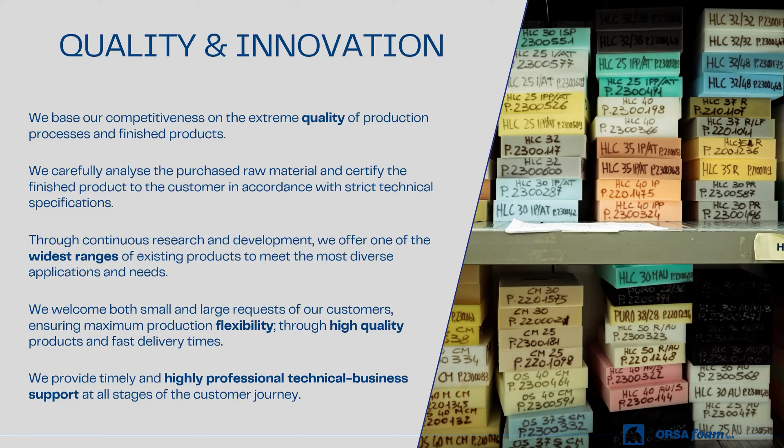And thanks to our laboratory, it's possible to study, research continually, and develop new innovation for this sector. The presentation of today will be focused on our sustainable material products. This is our range. This is one of the widest ranges on the market.

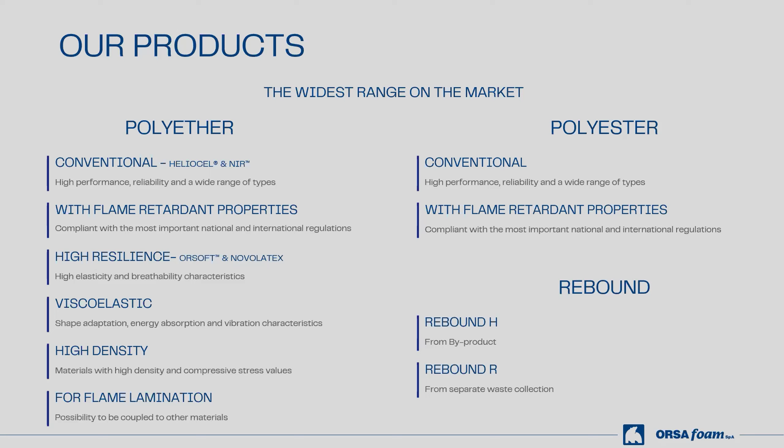We produce polyurethane foam in both polyether base and polyester base. For the polyether, we have the conventional one, the one with flame retardant properties, high resilience, viscoelastic, and so on. For the polyester, we only have conventional and flame retardant. And we also have a line of production of rebound foam. We have two collections here: the Rebound H that is based on byproduct, and the Rebound R that is based on separate waste collection. And we will see them later.

We've always been committed to sustainability. We have been active in this field since the early 80s with the production of Rebound H, which is made from our scraps. And over the years, we were one of the first to introduce bio-based polyol in polyurethane. And recently, we also introduced some products that can be part of the circular economy. So we use scraps, second raw material, for the production of rebound, and we also introduce repolyol in the production of polyurethane foam.

For those who don't know, polyurethane can have many different applications. First of all, the comfort sector, so furniture and bedding. As you can imagine, most sofas and mattresses are made of polyurethane. We are also active in the household industry with the production of sponges that are used to clean the house, the dishes, the car, every kind of surface. Also in the textile sector for clothing or other similar applications, for example, padding for bags.

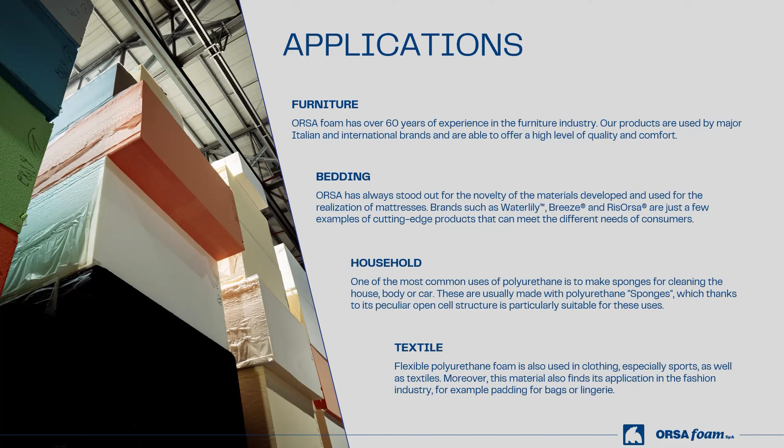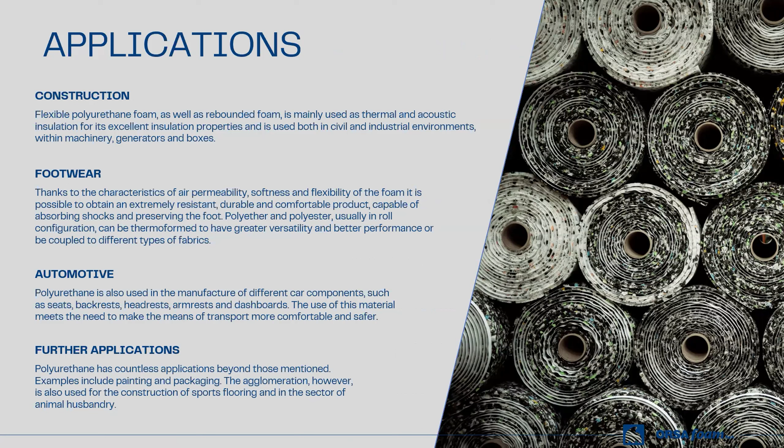And talking more about the rebound foam, but also polyester-based polyurethane, we are active in the construction sector, in footwear, in automotive and many other applications, for example, the painting roll, packaging, sport floors, and even animal husbandry.

So the main topic of this presentation is to present to you our sustainability journey and all the products that we have that have a good impact on the environment in different ways. First of all, as I told you before, the Rebound H is the first step that we took in this sector. It is a rebound flexible foam that is made with our scraps. It basically uses a byproduct: we take our production scraps and also those from our clients, and we take them back, granulate, and agglomerate.

This is like the first step that we take in this field. In the early 2006, we introduced the RisOrsa range that is made using soy-based raw material. This is the first introduction of bio-based polyol in the polyurethane foam, and this is a very performing product that combines breathability, comfort, but also durability and elasticity.

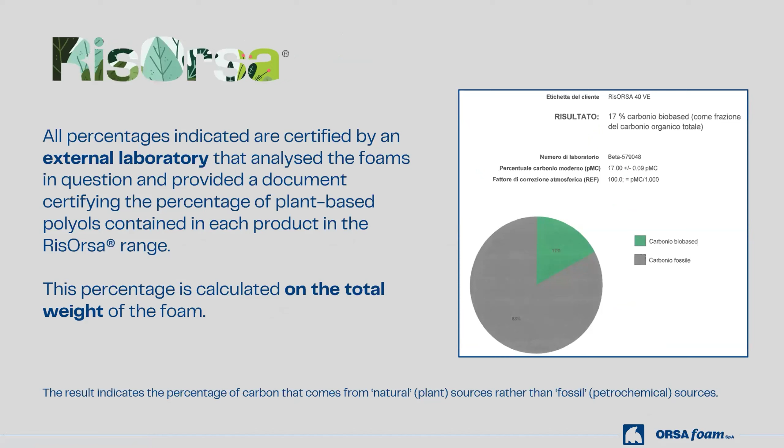In this slide, we show you one of the pages that compose the certificate, in which you can see the total amount of the weight of the foam and the percentage on the total weight of the foam based on renewable resources. You can see it in green.

Okay, in this slide, now we are speaking about another completely different topic: the ways in which we can recycle flexible polyurethane foam. First, we have energy recovery. During burning, the foam develops a high amount of energy, so it's possible to use it for energy recovery. The second way is mechanical recycling, so granulation. With this technique, we can produce rebonded foam, as already told by Davide.

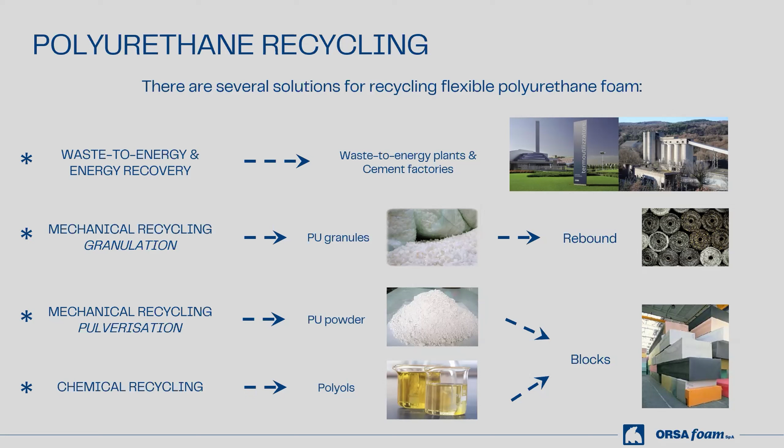Then we have another way of mechanical recycling by reducing the foam to a powder. This powder is added to the formulation in order to produce, again, flexible polyurethane foam. The last one, the newest, is chemical recycling. Through a chemical reaction, we can use end-of-waste flexible polyurethane foam and return to the initial polyol that we can use again in the formulation to produce flexible polyurethane foam.

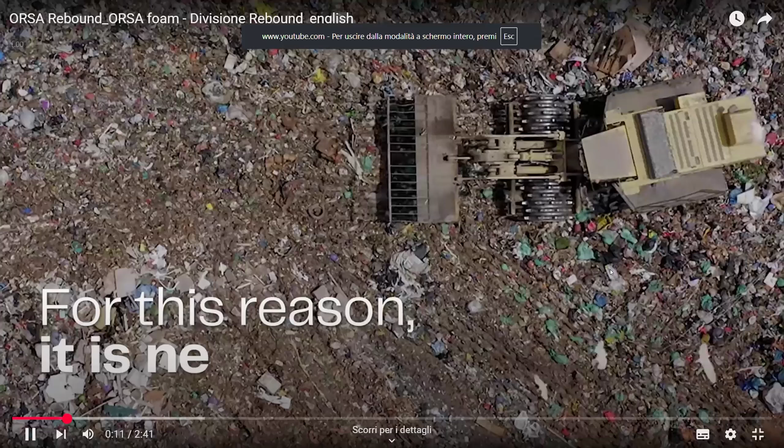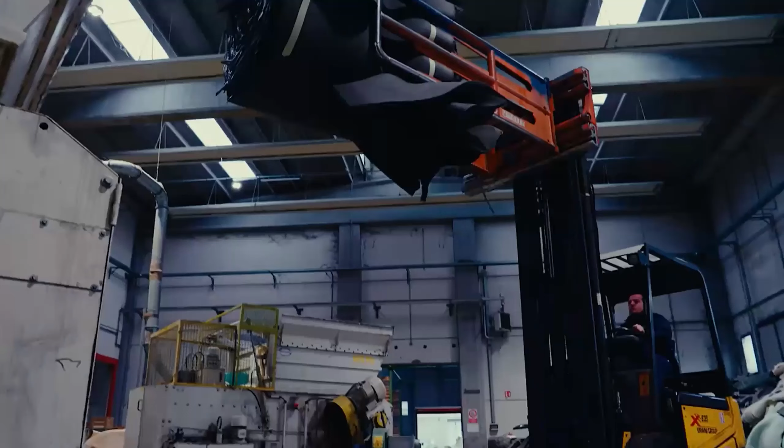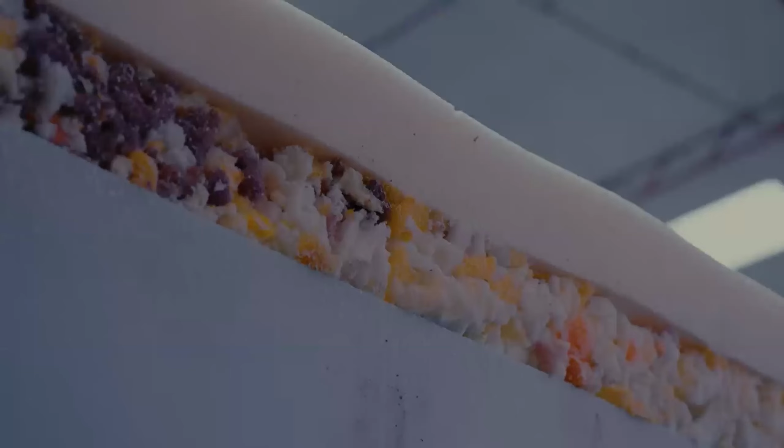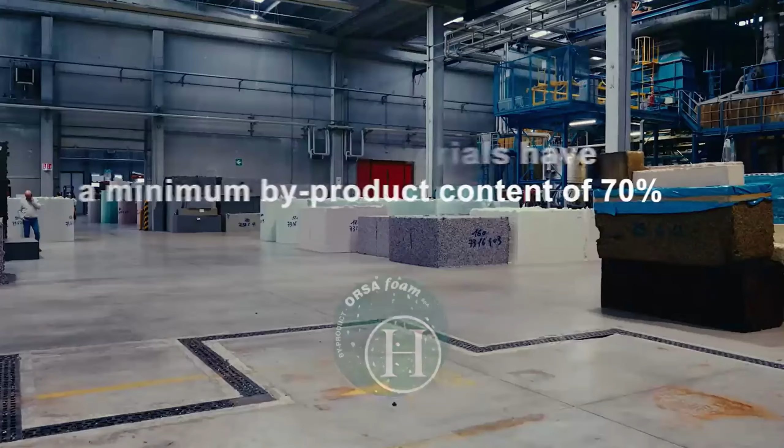Okay, here now we have a brief video speaking about rebonded foam. Okay.

So as you saw during the video, we are producing both rebonded H and rebonded R. H is based on byproducts, so scraps coming from the production of flexible polyurethane foam, and R, in which the main raw material is end-of-life mattresses that become secondary raw materials, so end-of-waste.

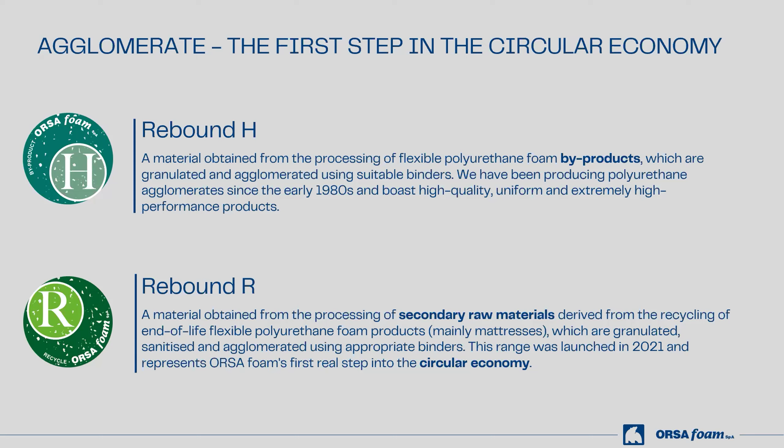We grind it in order to obtain grains. Then we rebond these grains by using a binder, and we can produce blocks to be cut in sheets, or cylinders to be cut in rolls for different applications.

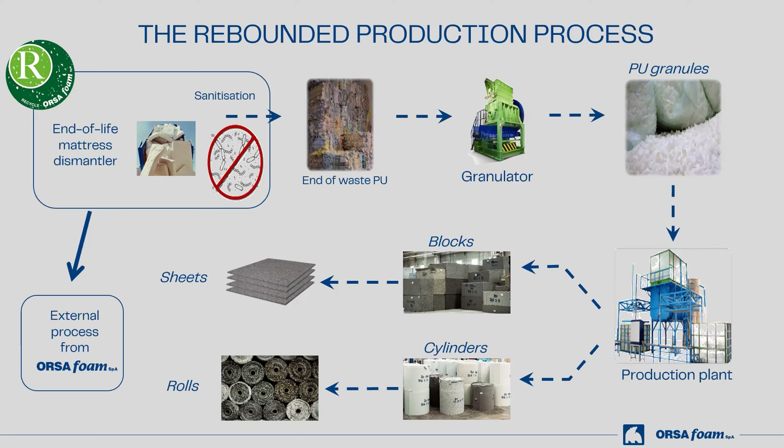Let's speak about the certification. Both H and R rebonded foam grades are certified according to Plastic Second Life, Plastica Seconda Vita in Italian, an environmental certification that identifies materials containing end-of-waste plastics or byproducts, like post-industrial scrap.

The certification is owned by the Institute for Promotion of Recycled Plastics, and thanks to this certificate, our customers can use our products for green public procurement, because the certificate is mentioned as demonstration of the technical requirements present in CAM, that are minimum environmental criteria.

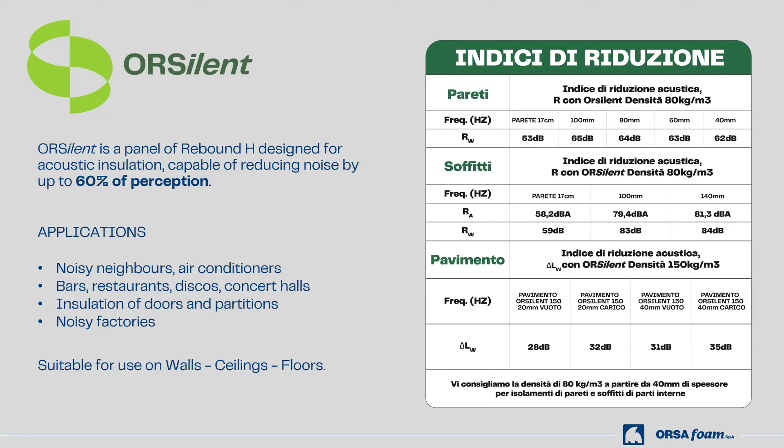Okay, now we approach the last new foam family that we launched this year at the Interzum fair in Cologne, Germany. I think that we have a small video also for this, and then we return together.

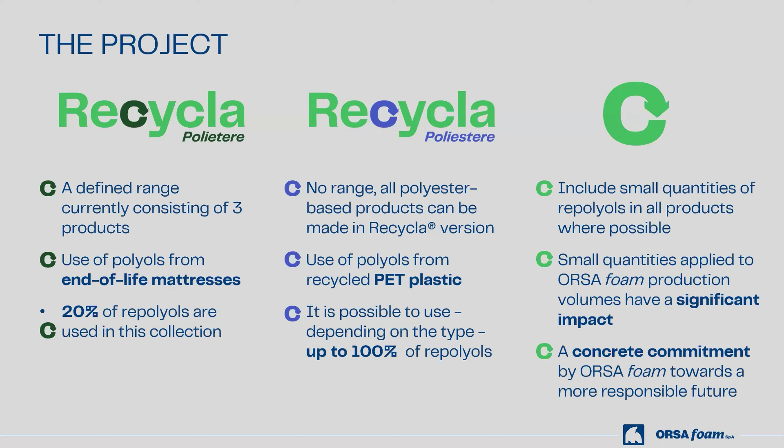The third scenario that we would like to approach is to use a small amount of this repolyol, so polyol containing recycled materials, in all our foam grades, in order to have a very big impact on the environment.

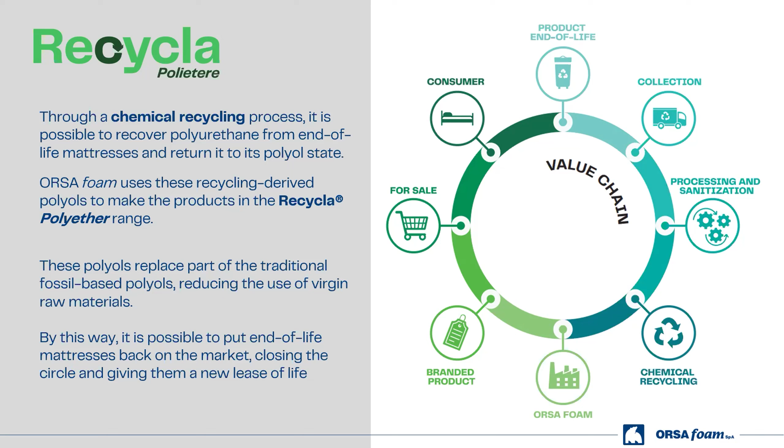Okay, here we can see again the same circle that we saw in the video. And I think that that's all referring to our project.

Going in deeper detail, we can say that at the moment, the range of foam grades that we are producing in polyether are three foam grades. One with a net density of 28 kilograms per cubic meter, conventional, beige, 2.2 kPa, that is the hardness.

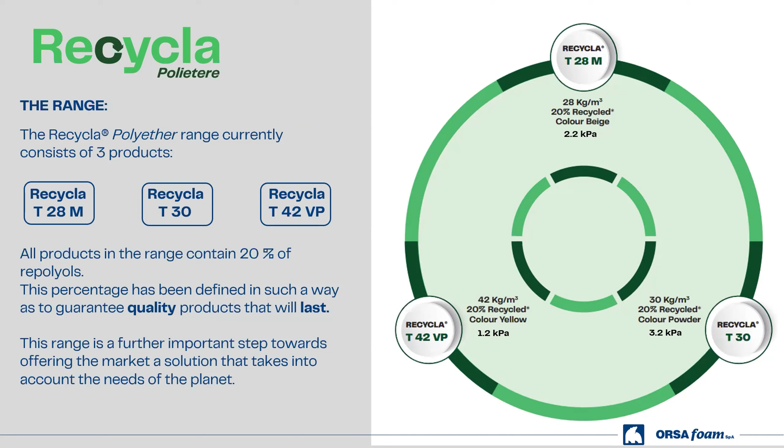Then we have a Recycla T30, that is a 30 net density with a 3.2 kPa hardness. And the last one is a Visco Foam, 42 net density with 1.2 kPa in hardness. All these foam grades are produced with a polyol containing recycled materials.

Referring to the polyester, I would like to remind you that in this case, the polyol is based on recycled plastic, that is PET. PET is the plastic with which we produce bottles for liquids.

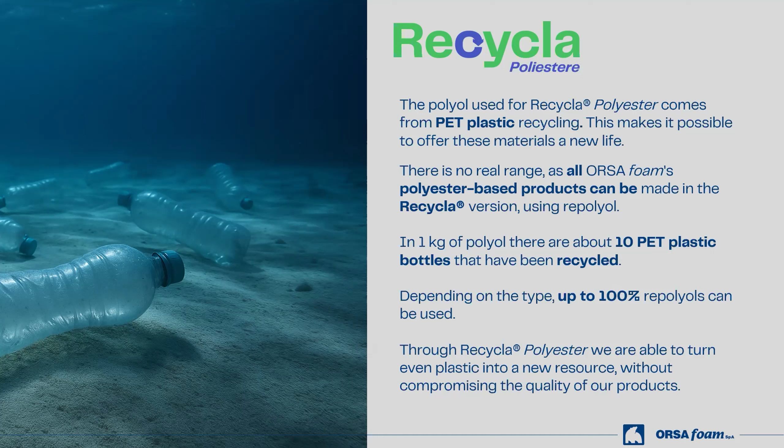We can say that in 1 kilogram of polyol that we use for producing our foam, there is contained more or less 10 plastic bottles of 1.5 liters.

The last one is, again, the third scenario that we already spoke about. That is the scenario in which we put a small amount of this repolyol in each foam grade that we produce, in order to have a high consumption of polyols and a great impact on the respect of the environment.

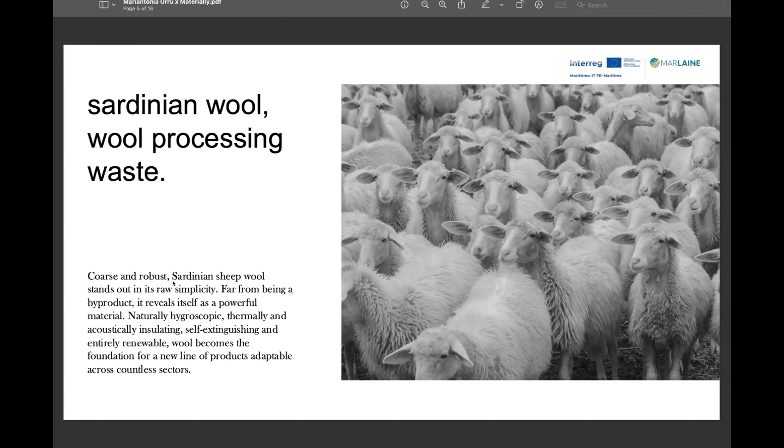So yes, our project is called the Staju project. It's a Sardinian word that means creating a comfortable environment, so removing oneself from the outside world and creating a comfortable environment for oneself.

How is this done? We work with wool, as I previously mentioned, to create our textiles, our design rugs, basically a whole range of products, where we select the most precious, so to say, fibers, which are the long fibers, to create yarns. During this process, a lot of material goes to waste because the short fibers are discarded since they cannot be used for the yarns.

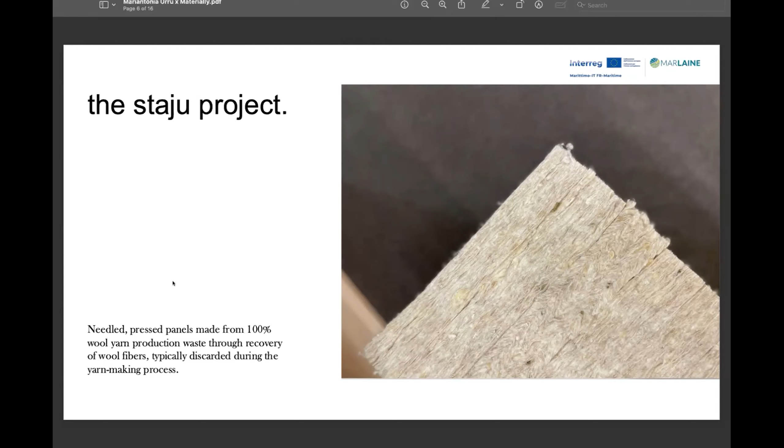That is why we thought of a way to use this perfectly good natural material, of incredible properties, to create products that can be applied in different sectors. So what we came up with so far, because it's an ongoing project, are these needle-pressed panels made of wool yarn production waste. We recover these fibers that are discarded during the yarn-making process to create a whole range of products that I will try to show you in the next slides.

Keep in mind, these are just some examples that I'm showing you. It's an extremely versatile product in terms of dimensions, density, and even color. So these are just a couple of examples that I will show you.

So the first one is a semi-rigid fiber panel. It's crafted from a blend of dense wool, so the fibers are very densely pressed together. It's combined with a bicomponent, which can be different materials according to what one is aiming for. It can be cornstarch if we're aiming for a 100% natural product, or it can be different other solutions.

This panel is very rigid and fixed in shape, so it's ideal to create a core pad for all kinds of applications that I will try to show you in the upcoming slides. But yes, importantly it stays in shape. It still has minimal flexibility, and it can be an excellent padding component or even covering component for all kinds of applications.

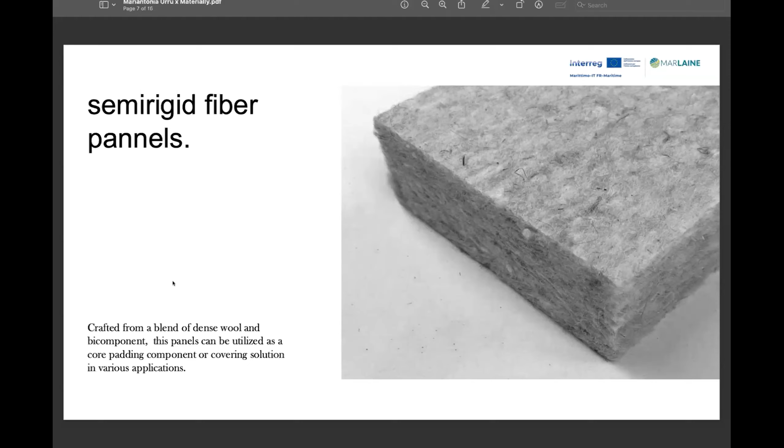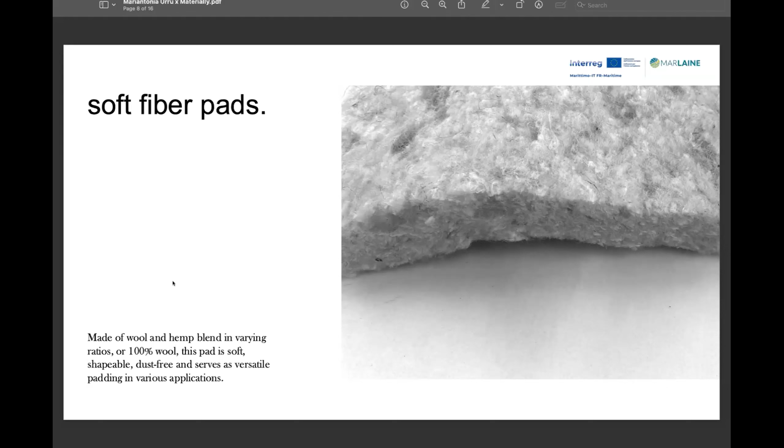The next one, adjacent to this one, is a soft fiber panel. It can be made of a composite of wool and hemp in varying ratios according to the softness one wants to reach, or also 100% wool. This pad, compared to the other one, is very soft, so it's more shapeable—you can curve and turn it. It's a perfect addition to the first one because it adds softness to the core. Very importantly, it's dust-free and also usable in all kinds of applications.

The third one I'm presenting today is the finishing product to this series. This one is a pad made of short wool fibers arranged in a vertical position so that the distribution is almost radial. This mechanical property is key because it can adapt naturally to all kinds of shapes, even curves or angles. It can close corners without the need of cutting, gluing, or whatever—it naturally takes the shape of the object that needs to be padded.

It's very flexible, as all wool is, shock-absorbing, and of course highly breathable. This goes for all three products because these are the basic natural characteristics of wool. Just in this case, since it's the finishing one, it adapts very well to create different structures and a lot of comfort.

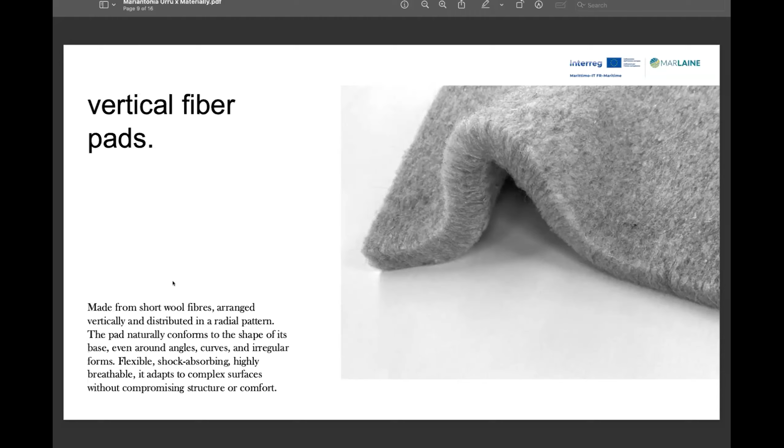The last one I am showing is a pretty simple one. Actually, the name speaks for itself: it's wool stuffing spheres. What's important to mention is that this product is 100% cruelty-free.

During the wool retrieving process, the animal benefits from removing its wool, like the animal profits from cutting its wool twice a year. So you are not harming the animal by doing this.

That's why we call this a perfectly cruelty-free stuffing option, as opposed to what we use now in down jackets, where the retrieving methods are not that great for the animal. In this case, it's completely cruelty-free, while maintaining the thermal and mechanical properties of wool.

So the fibers, just like in the first two cases, adjust to the different kinds of pressure you put on them and bounce back to their initial form. They voluminize themselves, so to say, by just coming in contact with each other all the time.

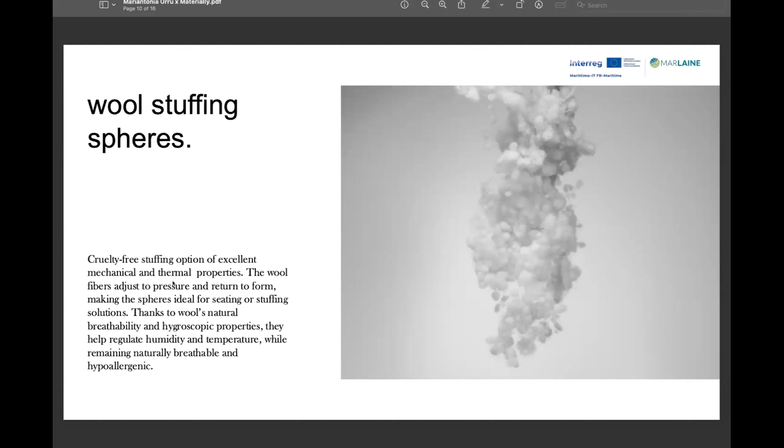As I mentioned, wool is breathable, hygroscopic, and it adapts to the temperature of the environment, keeping an ideal temperature, regulating humidity, while still being breathable and hypoallergenic.

Now, as I said, I will try to show you some case studies and applications. These are just a few examples we wanted to mention in the presentation, because the possibilities are basically limitless. So please feel free to contact us if you have new ideas.

What we have come up with so far are, of course, things related to the design world, because we come from the design world, especially furniture design, so upholstery.

This was a very funny take at Salone del Mobile, the design fair, where we created almost by chance this sitting arrangement called Sheep in a Box, because it's basically just wool pressed together with wool yarn to create this very comfortable, snuggly seating arrangement.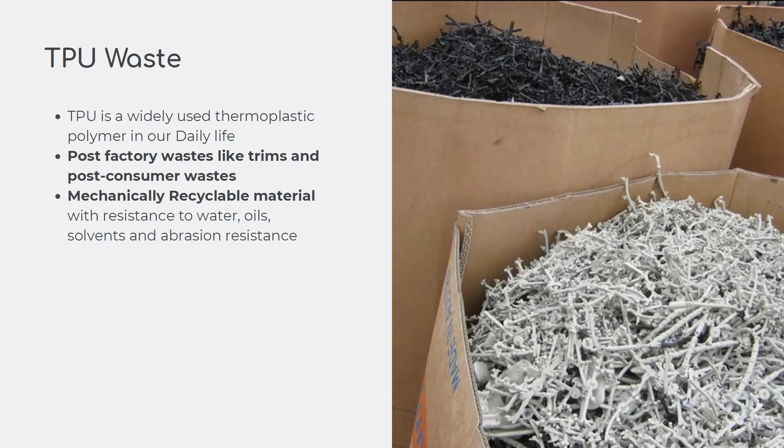And by default, TPU is a really good material in terms of resistance to oil, grease, basically any infection control, and a really durable, abrasion resistant material. So what we do, as I mentioned before, is we take the raw material, which is waste TPU, recycle it, make 3D printable filaments, and we use FDM technology to make lattice-based foams.

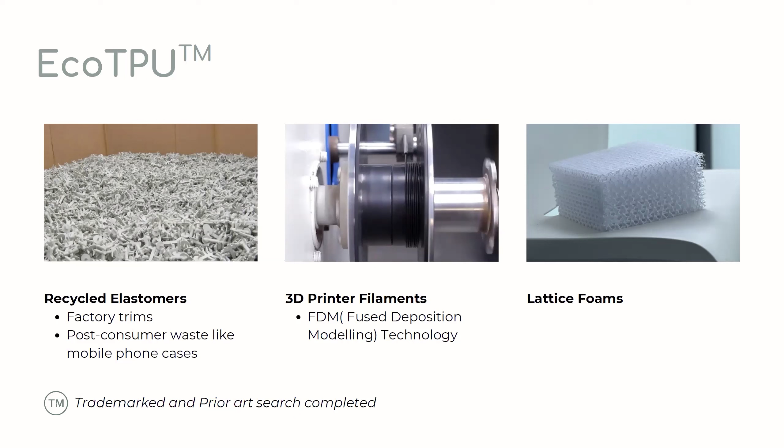And we call our material EcoTPU, which is a trademarked material under EcoLattice. So this is what we do. So we got a great material, and we make cushions or foam alternative out of it. And as the name says, EcoLattice beyond foam, it's more than a foam. We call it a smart foam.

Reason being is it's extremely lightweight because it's a lattice-based structure. So the combination of the material and the manufacturing process provides us great possibilities and easy to clean. The material itself has properties like water resistance, resistance to oils and grease, provides great infection control and is easy to clean. And it's a highly durable material and has really good fire retardancy.

And since our foam is based off lattice structures, we can easily customize the lattice structures, which enables us to have varying density lattices or varying density cushions. And we follow a zero waste manufacturing process. When I mention zero waste, every waste produced during the manufacturing goes back to the printer and becomes a new product. Even the product that we made can be recycled again and again. So it's a zero waste manufacturing process.

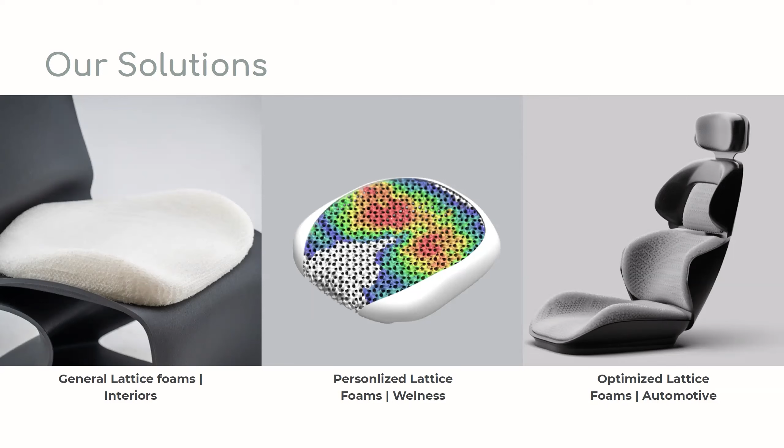So far I mentioned the material and how it is made and what it is made of. And now it's about how can we make that impact, like I mentioned, the realization of using the right material for the right purpose. So we currently have a couple of solutions. I'll take you through each of them. We have general lattice foams, and we have personalized lattice foams. Then we have optimized lattice, and each can be used for various purposes, but this is the best possible way I can explain the right purpose of the material.

So general lattice. When I mention general lattice, it's the same lattice structures throughout the foam, which means the foam will be of the same density throughout. That enables faster production time, large scale volume manufacturing, and is really suitable for interior products like sofa cushionings, all those things. And depending on the use case, we can change the densities, but it will remain the same Shore hardness across the foam.

And the next one is personalized lattice. Like I mentioned, our foam is based on lattice structures, and we can manipulate those lattice structures. The first one, general lattice, is even density. Here, the main difference is the density of the foam varies from point to point across the cushion. So what we do is take the pressure point data. Basically, when a person sits on a surface, we take the data of the pressure created by that person and translate it into our cushion.

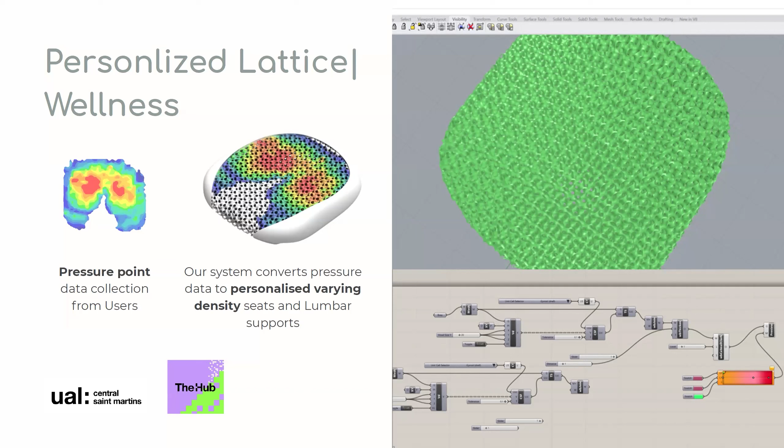And it's ideal for use cases where people spend a lot of time sitting, like customized seats for long drives, or customized cushions for your office furniture, work from home chairs, wheelchair users. For wheelchair users it's really great for pressure relief, and even for lumbar supports, because we are 3D printing the soft material. That allows it to match the body contours of the person. So we can customize and provide lumbar supports, all those kinds of products close to our body, made just for that person.

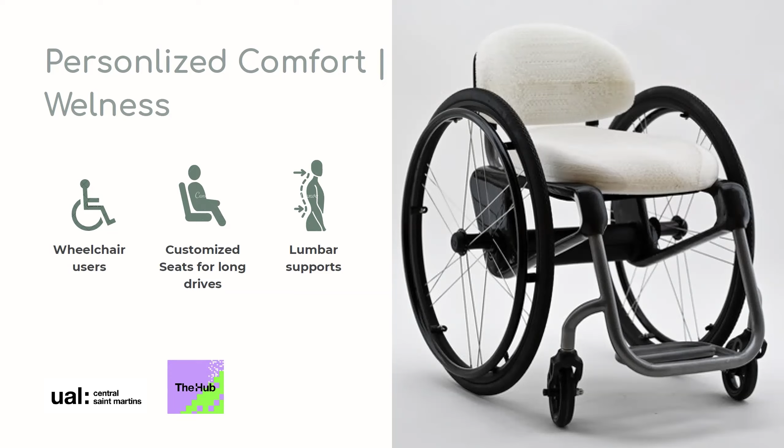And the next one, this is actually one of my favorite, and we are currently really working on this one. I think it's a revolutionary thing right now. So I mentioned general lattice and personalized lattice. And the optimized lattice is basically we are collecting as much data as possible from various people and as diverse as possible, like various gender, age, height, weight, and we are trying to make clusters of this data and trying to optimize the lattice structures.

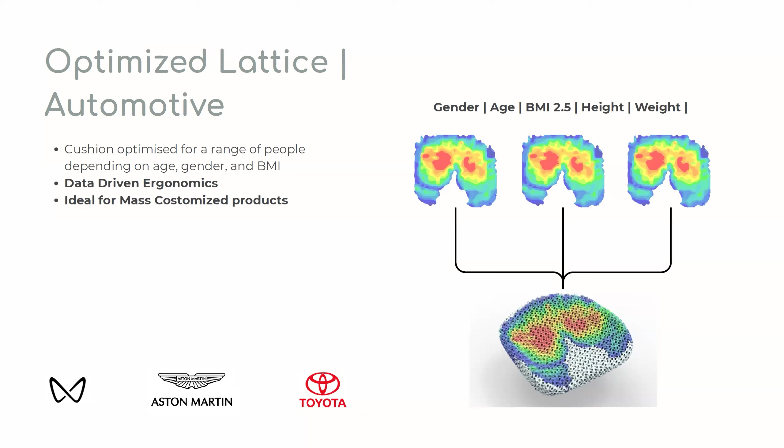So in a way, we are redefining the ergonomics. Traditionally, we have the percentile ergonomics, or large, medium, small. All these are for mass manufactured products. But what we are trying to do is a data-driven approach for ergonomics. So we make clusters of data and optimize the lattice structure. So this is really ideal for mass customized products, for example, automotive seats, or mass-produced office and work from home furniture, etc.

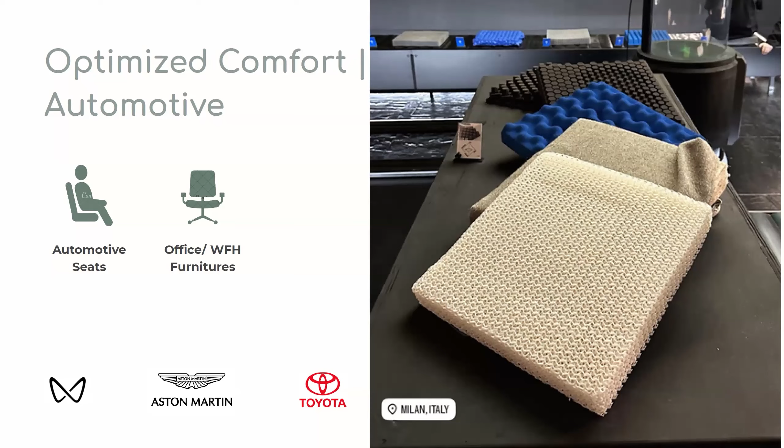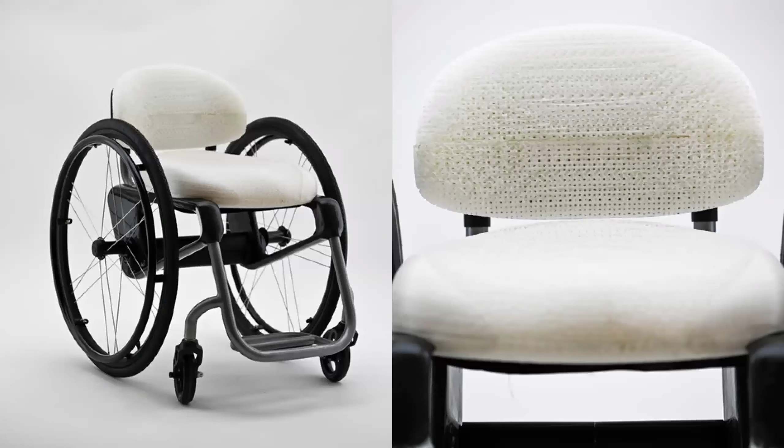And finally, this current project which we are working on is cushions for wheelchair users. This is the personalized lattice area where we'll be taking the pressure data of the person and converting it into a lattice-based cushion, and that allows you to have a cushion designed precisely for the person. And yeah, that's about us.